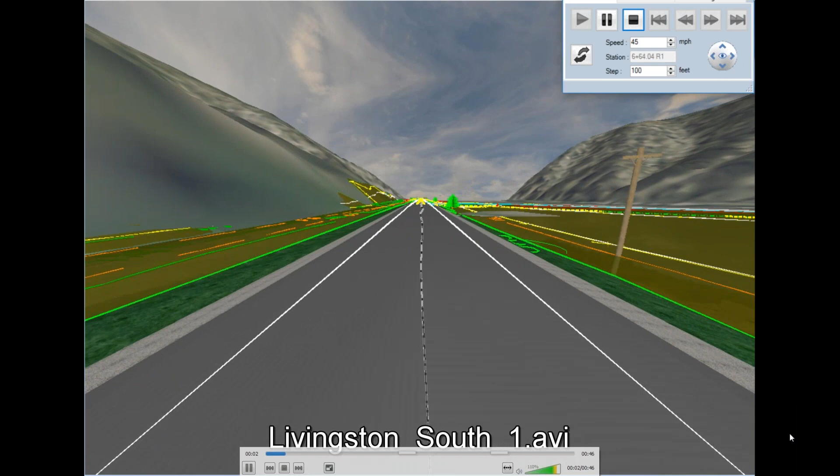So I remember when they started sending those out and talking to us about it, the whole auspice behind those was better design because our survey came in electronically, and then ultimately that electronic data would go back out to the field, and we wouldn't have to rewrite all those notes, recreate the entire project in engineering apps. That was 1998. Fast forward 20 years, and we're still not there. We're still struggling getting our design out to the field. They're still having to recreate that project in engineering apps.

Now, we're rolling out TBC. That's a huge improvement for them, but it's not nearly as good as what this is going to be able to do for the field. The other thing I love about this is, how many of you guys have done public meetings?

Have you stood up in front of a crowd and tried to show them plan and profile sheets, and watched their eyes glaze over as you're showing them these black and white sheets with a bunch of lines on them? They don't get it, they don't understand it, and that's not their fault. They're not engineers, they don't understand our design details. When we can roll out with a visual like this, or a model, and show them a video of what that road's gonna look like, that's huge.

It's a huge benefit, and it sets us up for success. A lot of our plans, they don't understand, and a lot of times we've gotten miscommunication with the public. They don't understand how close to their house the roadway's gonna be, what it's gonna take out with our project, and we end up setting ourselves up for failure a lot of times. Being able to roll out more of this is gonna be a huge benefit to us, and I think it's gonna make your lives easier going to public meetings, dealing with angry landowners, you name it. I think it's gonna be a huge benefit.

One of the major bills we had at this last session was Senate Bill 182, all about public involvement and communicating with the public. To me, this is a huge leap forward in providing that better communication, so that we can show them exactly what our plans are gonna do and what it's gonna look like, because they don't get that black and white, two-dimensional, bunch of lines on a piece of paper. This is a huge step in the right direction.

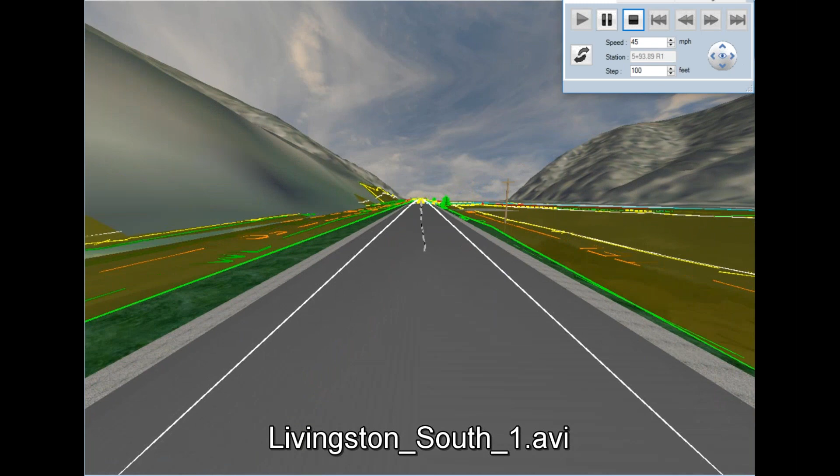Thank you both for taking time out of your other meeting you're supposed to be at, I appreciate it. Okay, I'm gonna turn it over to Megan now, but I want to announce that I do have a couple of power users in the room, Aaron Mason and Mike Dagenstein. They are just absolutely huge, I can't say enough good things about them. They are rock stars on my SS4 development team. This project you're looking at here is Mike's, and he did use this at a public involvement meeting. So if you have questions about how he produced this, or any reaction he had from the public, I'm sure he'd answer any questions you have.

So with that, I will turn it over to Megan, and you're away, buddy. Yay, thank you so much. Most of you guys have not had to sit through talking to me or listening to me talk for two days, so it's your turn now. I'm sorry. First, I'm gonna attempt to learn how to shut this thing down. Start there. There we go.

All right, first thing I've got is a fairly short PowerPoint, believe it or not, I promise it's short. I'm actually going to tell you what I'm going to do. We've got 5 topics. First one I'm going to go over is there have been some changes to our plan sheets, I'll hit those briefly. Then file structure, big changes in our file structuring based on the inclusion of a 3D model now. We're going to go through both the existing and the proposed, there's 2 different sets now that road design oversees, as opposed to us only having our proposed design files.

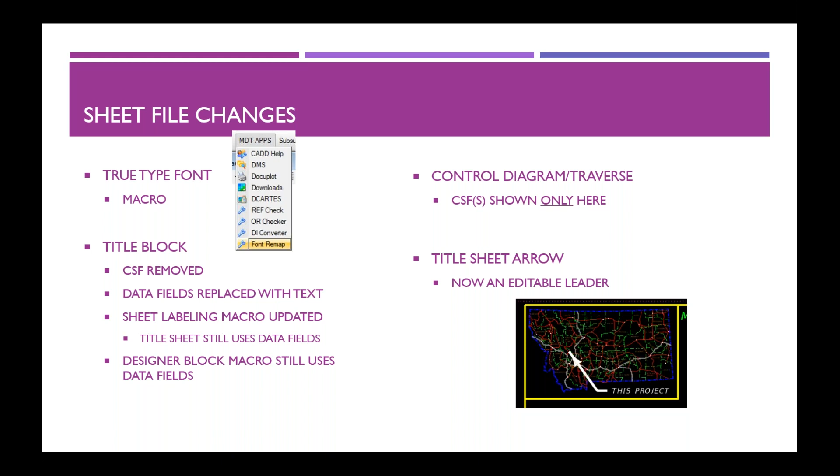That pretty much rounds out the CAD memos you've seen about plan sheet changes. I hope you guys are reading those, because I guarantee if you ask me about something that's in one of them, I'll laugh at you.

Moving on to file structure. The existing design files - we have new ones. We're not going to be relying on the DI map, the photogrammetry map.

We'll have a terrain file. This is a three-dimensional surface created from survey tins. That basically sums that up.

Second, we're going to have what we're calling an existing feature file. This is where it gets a little different. The existing feature file is the survey photogrammetry line work. We take it and copy it into our own file, and we do what we need to do visually to make it work for our cross sections and for our plans production. Survey is not to the point in their 3D development yet where they can give us the file in the format that we need. So we'll be taking all of their work and putting it into one single file of our own. We'll no longer be referencing 5 DI maps and a photogrammetry map, or even one DI map - what we're going to be using is this existing features file.

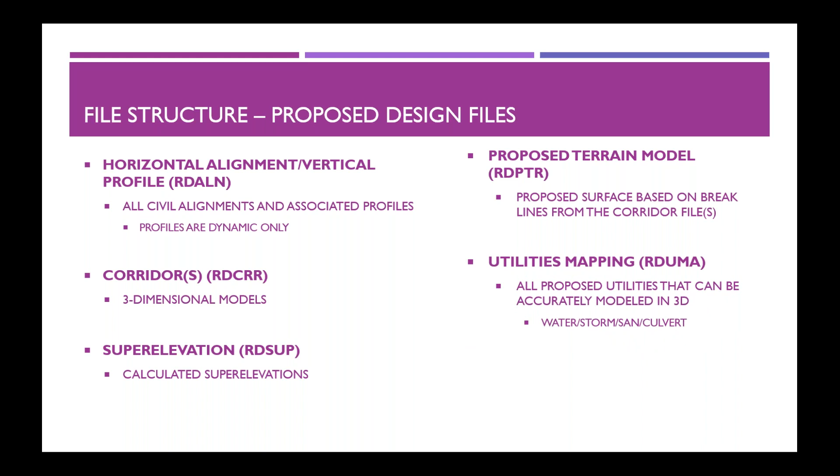Did you say the RDUMA is both proposed, accurately locatable, and able to be modeled, as well as the existing? Yes, we do have both. Yes, Damien, so how do you know if—

Oftentimes we have—I don't want to call it 2D, it's really just surface—we have SU-1 survey. We kind of know where the utilities are. They're below ground at this point. We know how deep they are. Are we going to do SU-2 on everything? Or how do you guarantee that your model has the utilities—

That level, then don't model it. If you don't need it to that level, don't model it. We still get the 2D one call, surface spray paint mark, put in the other file. That's the existing features file. We'll still have a file—the survey will still pick that up. Mostly I separated them, in my mind, into this is the hard and this is the more soft, flexible.

I have a little bit to add to that—RJ is in on the mix on this. We have an experimental pilot project on Custer where we're doing ground penetrating radar and EM induction, where we're able to locate to a lot better accuracy as far as depth goes. So we'll have to have some discussions as to where that information goes—it's not actually physically located, but we're within a few inches depth-wise where that should go. Yes, we will have to have that discussion. So that'll be above my pay grade.

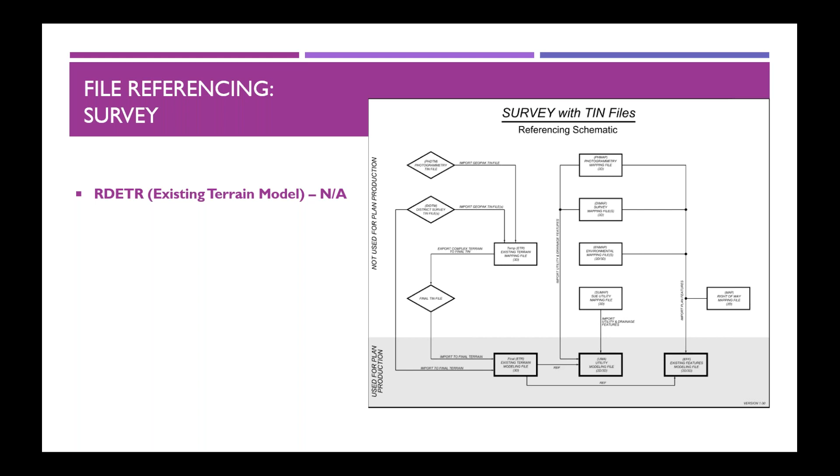Second one, the existing features file - same thing, kind of. These are the four types of files where you're going to merge in the line work from the other disciplines - photogrammetry, our district surveys, environmental wetlands type stuff, and utilities, if we've got just a planimetric SU where we're not getting it, it's not in there. The other thing that will get merged or copied in are existing right-of-way and eventually proposed construction permits, because this is the file we use to cut our cross-section ancillary features. Otherwise there's no reason for us to have right-of-way in there - we need it to cut those steps.

So everything on here, is this still a shape file? Not a shape file - it's a DGN. This is just a 2D file? It starts out as a 2D file. So everything that you're listing there is draped, if it's... it will be draped, yes. When you create it, all of these four files will come into the plan view two-dimensionally. We don't want the 3D data when we bring it into the existing feature file. So what about pipes?

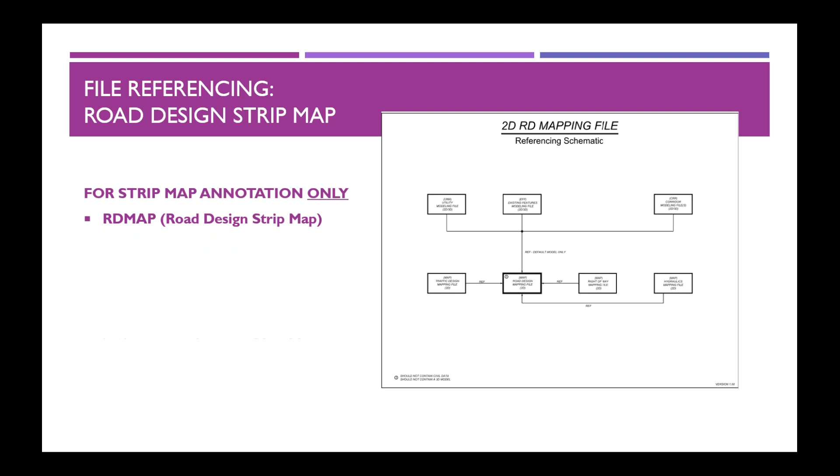We'll start with the strip map. The existing feature file will be referenced in. The utilities modeling file, all of the corridor files—that's where the construction limits are. You'll reference in your geometrics just like you normally would. You'll reference in the right-of-way just like you normally would.

And the hydraulics file. But none of this—the existing features, the corridor—none of that's going to actually live in there. Just that alignment and profile.

Now the 3D modeling—we've got everything split out into pieces based on Bentley's best practice. There are four different file types—watch me be wrong—four different file types that are utilized in our 3D modeling.

First one is the alignment file. That's the one you start with. That's what everything else is based on. Without an alignment and profile, you really can't do much else.

Second one is the corridor. Without the corridor, you don't really have anything other than the existing ground. So in the alignment file, you need your existing terrain, just like when we use criteria and we create that existing profile right off the bat.

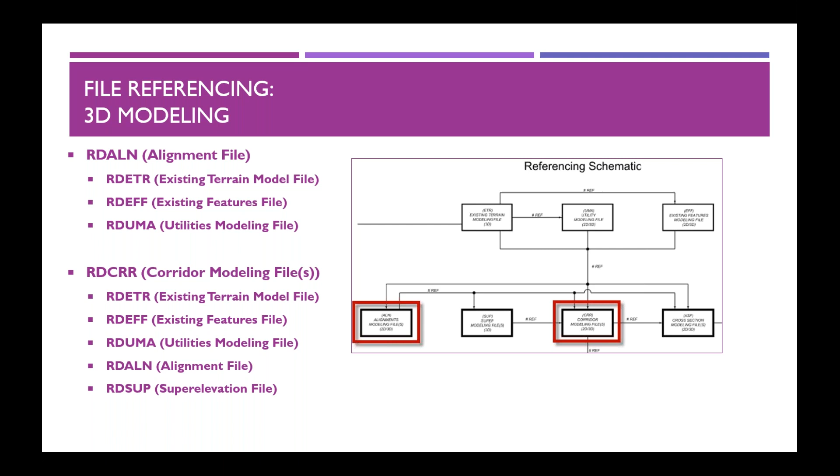So the other two 3D modeling files are the super elevation file, and there's that utilities modeling file again. The super elevation file has to have the alignment file in it. That's the only thing it needs in there. It's based completely on the alignment. It doesn't need to know what the corridor is. The corridor needs to know what it is. The only thing that goes in there is the alignment. It doesn't care about the existing ground, the existing features, nothing.

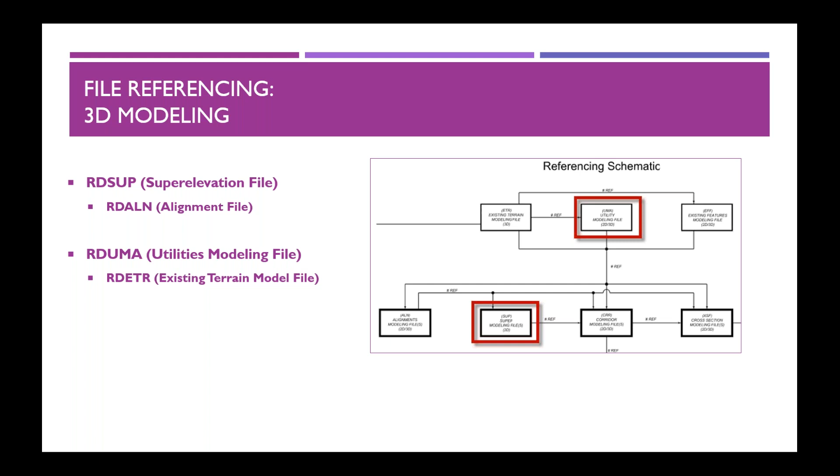Utilities file, it does need that existing ground. If you're looking at your proposed culverts or even your existing culverts, you can actually cause them to tie in to your existing ground. You have to have your existing ground to do it. Apparently that was the only one you needed.

Now, for plan and profile sheets. This is where I was saying that we're not gonna get the same things in our strip map that we're used to seeing. So anybody that uses our plan and profile sheets, anybody that looks at them, you're getting different things from different... yeah, Damien? I look at it. Oh. I couldn't have it, I didn't finish the sentence.

Corridor file, this is where your break lines are gonna be. This is where you're getting your edge of pavement. This is where the construction lines will sit. This is where ditch bottoms, any kind of break lines we're used to seeing will show up in this file, and only in this file. You are not gonna be copying them out of this. They are part of the model. They're integrated into the model. They're not separate line work.

Existing features file, just like we used to do with the DI map, same referencing scheme, all the break lines, those utility custom line styles we're used to seeing.

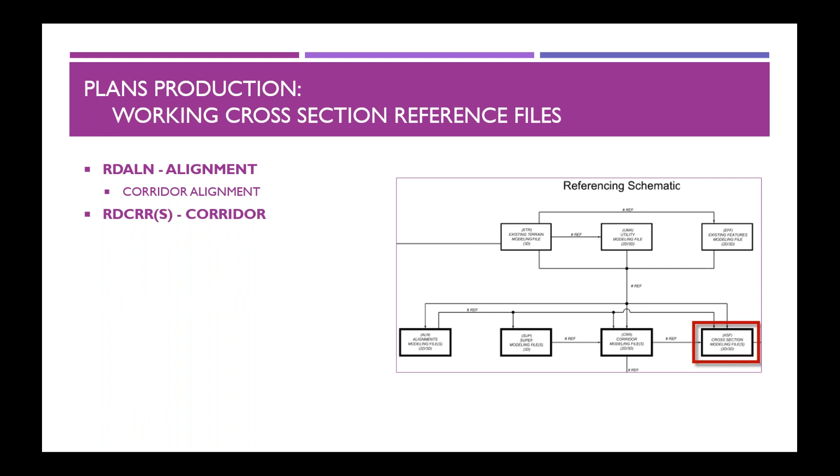So the list is kind of long. First, the alignment, corridor alignment. Second, all of the corridors. You're not going to see road typical section, you're not going to see cut fill, you're not going to see sub-X, any of that without the corridors.

The existing terrain model, that's what's going to cut those existing cross sections for you. They're not a separate entity anymore. Existing features - this is why we're talking about draping those utilities. This is where it will cut and put in the wetland, edge of water, overhead power, underground power features for us. That also is no longer a separate process.

Utilities model - like I just said, it will also cut modeled utilities or modeled pipes, I guess is probably more accurate, in the cross section accurately. Which, by the way, does look a little strange because it cuts them accurately. So if you cut down the middle of a pipe, you have a gap at the end because there's actually nothing there. So it's going to take a little bit of rethinking to get used to the way it's doing it. And that's part and parcel to the software because it is accurate - that we can't just change to make it look like it always looked.

That sums up the talking a lot portion of my presentation. Do we have questions that you guys didn't already ask me? And if you run out of questions, I will go into the example.

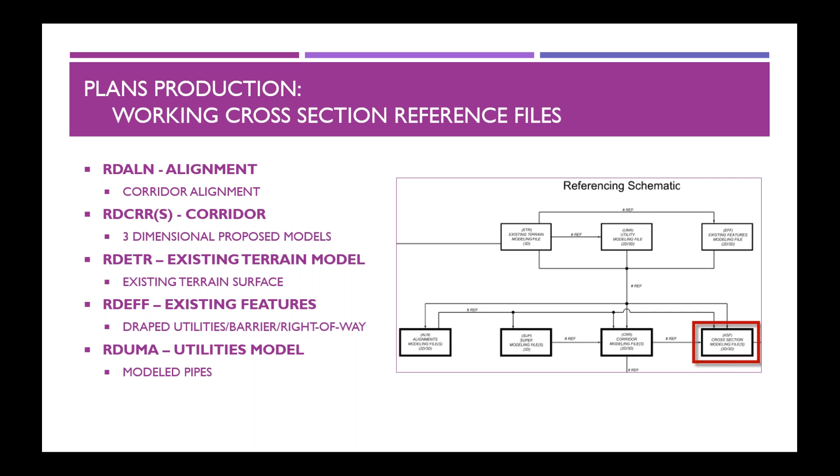All right. A lot of different files. Sorry, we keep cutting out. We got people on the phone. Do they have any questions? I asked, nobody's talking. You guys there? Anybody? Maybe they fell asleep. I tried to call in from my office and then got back from a meeting and the online portion wasn't working, so that might be when it dropped off. Well, they're still there. They're all still there. They're all still muted. Oh, Ben's unmuted, but. This is Ben. I don't have any questions. Okay, well, good. You're still alive. Good.

All right, well, in that case, I'm going to run through the basics of a project. That's hopefully better than I did the first time. What was that? I just told Bryce to look away. Oh.

All right, so the first thing you're going to notice is that this is not the startup menu that you guys are used to seeing. This will be the new one, which we intended to have rolled out before we started this. This right here, this Road 2018, I keep forgetting that you guys on the phone can't see this. This 2018 is our finalized enhanced workspace, let's say. It's the one where we finally got with Bentley and they showed us what we probably should have been doing before we kind of took off and tried to fly by ourselves with the first one. So there's nothing really intrinsically wrong with the enhanced workspace we have now. This one's better. It's not going to be a big change across. It's not like the enhanced versus legacy. You guys that don't model or any of that, it's not going to change a thing.

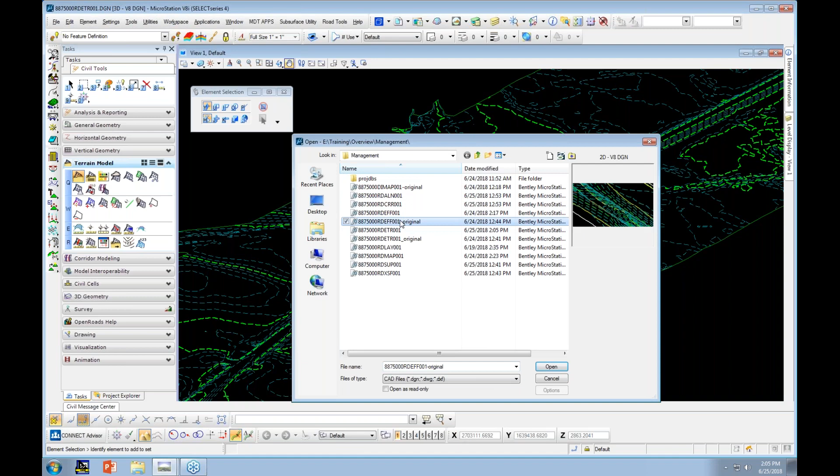Now, the original - here's my original survey line work. And I'm not trying to lay blame on any survey crew, I'm just trying to prove a point.

That's what came in, that's my center line. That's how that was processed and sent to me. It just so happened that I was far enough along in the project that I didn't even notice. So, I mean, you don't even notice.

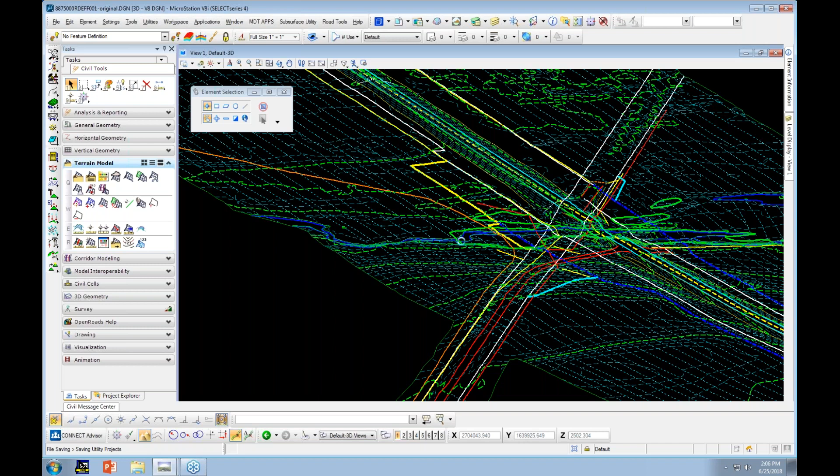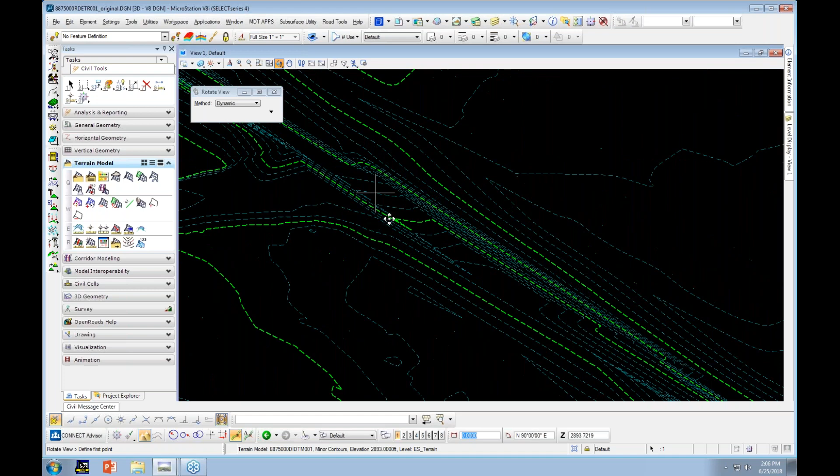So this is actually, whoops, the same thing. There's my edge of pavement center line. I don't know how you guys see that, but I know where it is. The original.

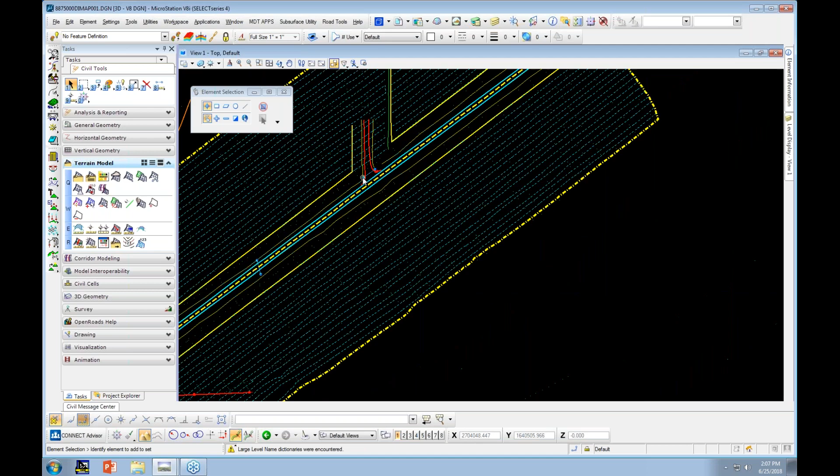That's my bottom of bank. So that causes a really large blowout in my terrain. And the only reason, like I said, I'm not trying to lay blame on the survey crew, but this is why we need to be checking these.

This is, I have a TIN and a DI map that are different. They have errors in different places. Because the TIN caught this blow, but it didn't catch the edge of pavement in the center line.

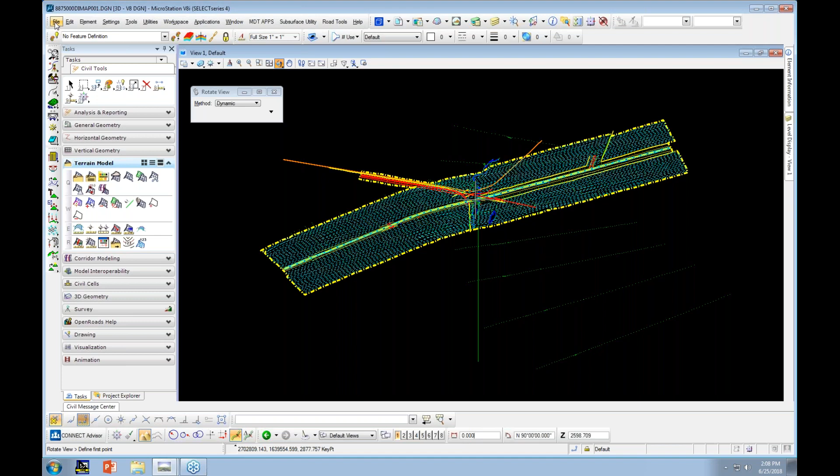So now I'm supposed to create a 3D model off of this, because it's not supposed to be me that's editing it. This is one - sometimes we've got to merge five of them together in a different combination of merge and append.

It's a nice thing too, there's a couple things that makes me think of. All that 3D line work came from survey. It's accurate to elevation and location. It comes in as 3D line work. We don't use that - we take their 2D line work and drape it on the TIN.

Yeah, except for the terrain part. Right, it is break lines in the terrain, but I just, like this culvert placement, the pavement markings are the detour pavement markings. So it's showing me the crown of the road moved 2.5 feet over, but there is no point shot out there in the travel lane. So it's, do we need to change our methodology? Should we be shooting points closer together, stuff like that?

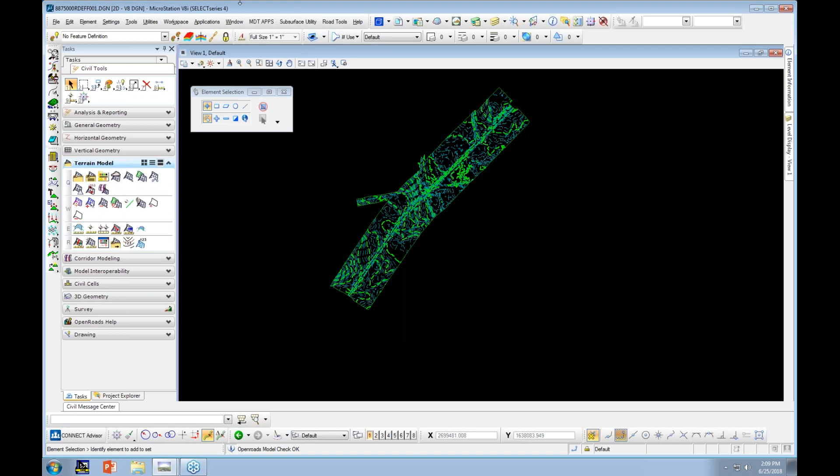Now I'm going to get off my soapbox. I made my point. It seems like there could be some error introduced there that might not be easily caught.

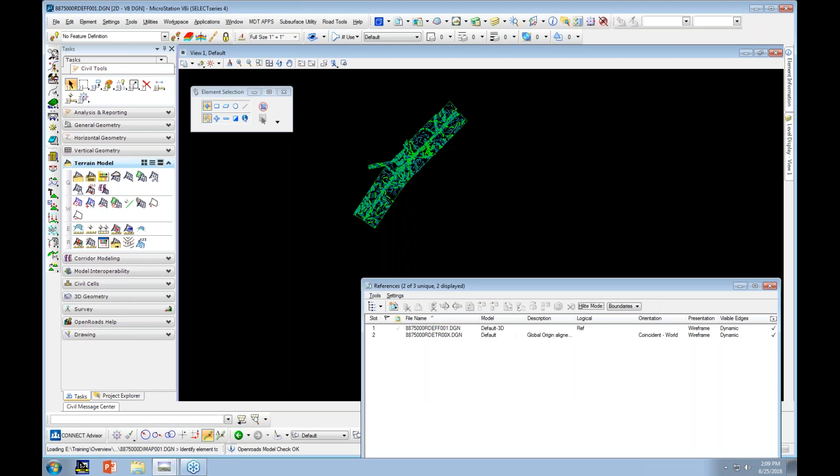Alright, so this is the existing feature file. And I'm not going to get real into this, but this is where I would get environmental, district survey. In this case, I'm grabbing the right-of-way map just to get certain pieces out of it. Pull it all in, and then you would go and merge it into the master.

So then all the levels are on first. Yeah, I'm in a hurry - I ran out of time last class, we're not going to be picky. So now what I've got is a two-dimensional strip map, planimetric, completely flat. But I've also got my terrain in here.

This is where that ancillary features comes in, and this is what the designers are going to do for each of these features. So if I've got - there's my overhead power - what I'm going to do is apply a feature definition to it. That's a preset set of specifications for what it looks like: plan, profile, 3D, and in cross section. That's how that ancillary cell gets populated.

It's pre-set up. This is what Bentley went through with us, we vetted it over and over again, we're happy with what it's doing. I'm going to just very quickly do this - I'm only going to do it once instead of making you guys watch this 30 times.

I got the power overhead around it. All right, there it is. U is underground, X is overhead, not crossing. So it applied it. It's not anything that you guys will notice, but now that we've got it...

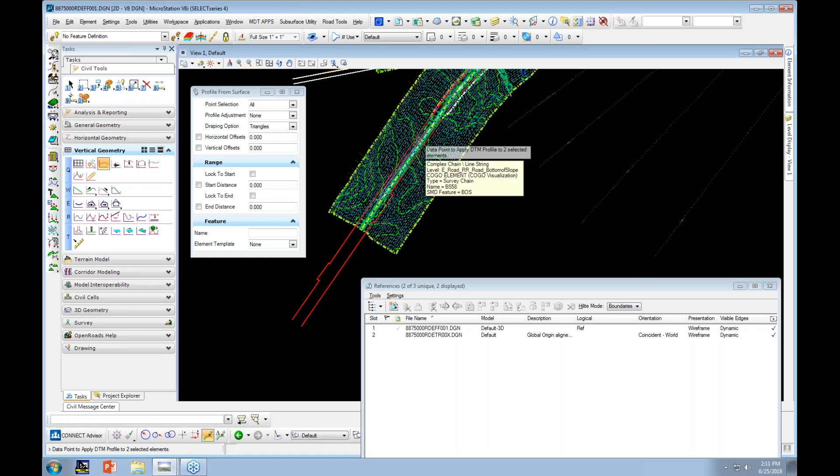This is where you get your ancillary feature to set on the existing ground. You're going to create a profile from the existing terrain. So I'm only doing this for the power, the overhead power that I grabbed. Ignore my click happiness.

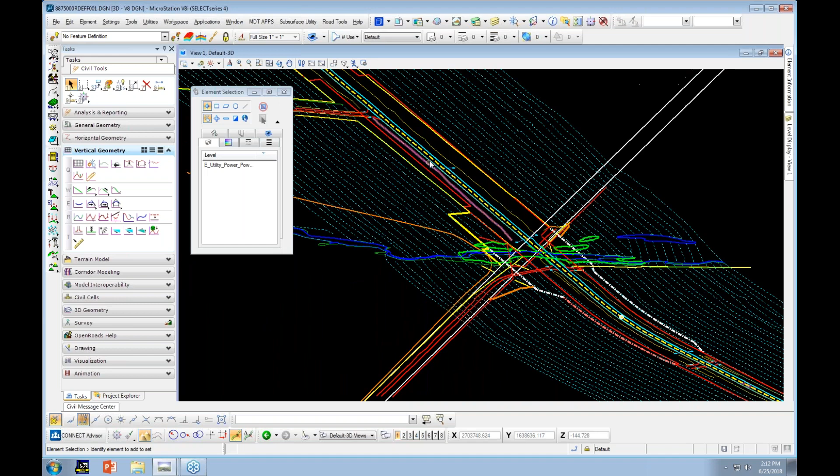Then if we go and we look here in the 3D model, apparently I already did it. Ahead of myself. There, that is everything draped on the terrain.

So now any cross section that's cut needs to actually have the correct line height. That's what that'll look like.

Once you get these two done, put them on DMS, pull them down as view copies, do not mess with them unless for some reason you need to add something. If you get a pickup survey, when right-of-way gives you construction limits or construction permits, when final new acquisition gets defined, those are the kind of things that you'll put in here later. This isn't one that gets pulled down every day and messed with.

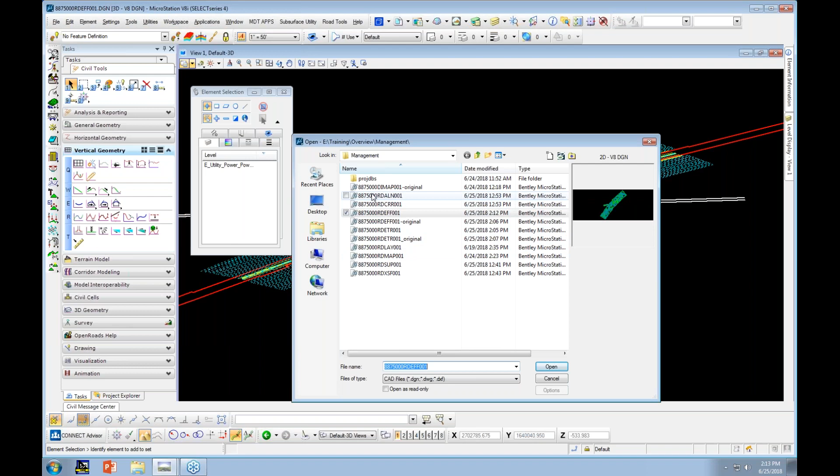Once you've got all of that, then you actually go into the design.

Really? No, it's not. I promise. Oh, it is. I have two files open. All right, this is the alignment file.

So I've got an alignment drawn here with civil geometry. It looks the same as a drafted one, except it's marked. All these labels that you're seeing—the bearing, distance, radius, start station—that can all be changed, and it will filter through to your profile, to your corridor, on down the ripple effect.

Profile, same thing. Profile's got all its pertinent data in here: curve length, K value, slope or grade.

One thing about the civil alignments profiles, these two are incontrovertibly linked. Unlike GeoPak, where you have a plan and a profile that really have nothing in common as far as the GPK is concerned, these two only match to each other. So if I create another horizontal alignment, even if I copy it, this profile that I've got right here doesn't come with it, can't be matched to it. You have to create another one. When you export it to GeoPak, you lose that, but as long as it's in OpenRoads, they are a pair.

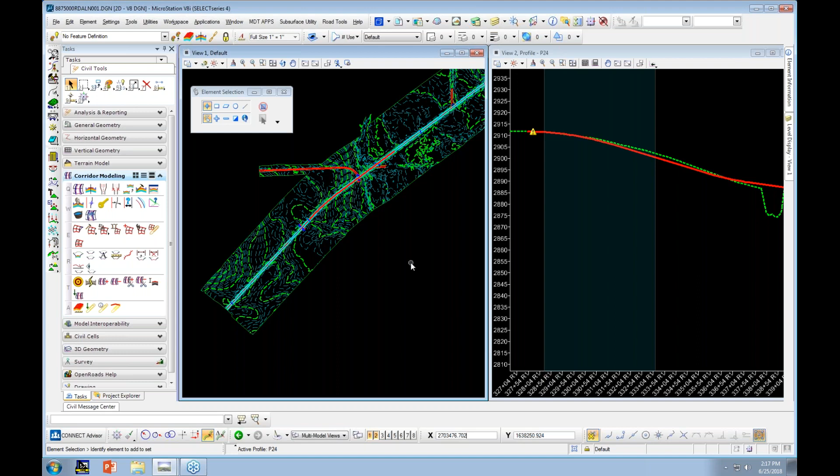Center line, put it on wherever you want. So in your interstate, you're asking, we have a median alignment that sort of dictates what's going on horizontally, but it could deviate off from that.

We can absolutely do that. The sky's the limit. We could add ditch alignments and profiles too, and you could have your cross sections running off of yet a different alignment that has nothing to do with any of those, just because you want to capture everything that's going on. There's no limitation to that.

This is one of those things: draw it off of here and it has to go left and right. But this profile is what the 3D element of that horizontal is doing. These two are together, there's no taking them apart anymore. When she created this profile and activated it to that horizontal, it's not just some bunch of geometry that can be separated out from it. It is tied together, and they look at each other for defining.

But I can certainly take, maybe this is what you're asking, that median alignment, and run a separated template down it, but then I can run an alignment down the inside shoulder of, say, westbound and the inside shoulder of eastbound, and tie that template to those as well, as separate pieces. Your center line would still be down the median, but you can tie any pieces of the template to something else and build off of it.

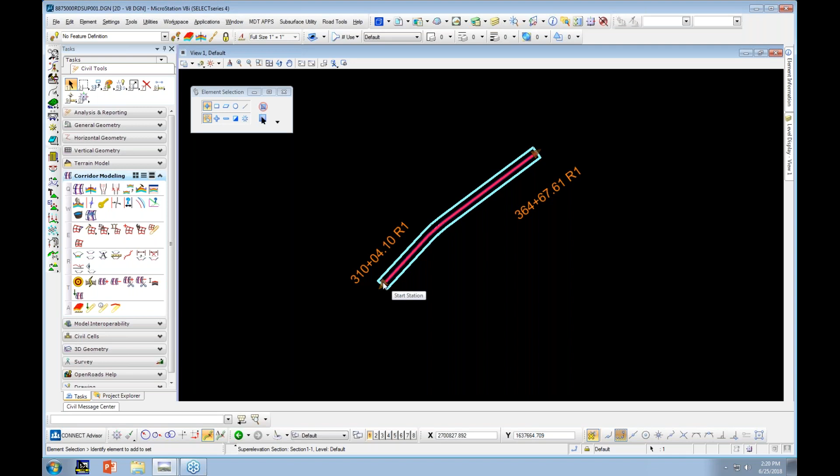On the modeling side, now what we're going to do is create the super elevations for this. We have our horizontal, we have our vertical. And what the super elevations look like, it gives you sections. You can usually get away with one section unless your project is, say, 11 miles long, so it doesn't have to necessarily be divided. Within the section there are lanes, and these are similar to what we see in criteria.

One thing to note, in OpenRoads, -2 is normal crown on both sides, for some reason. It's not like criteria where one is positive and one is negative, but it's different in the templates. I don't know what the designers, or the programmers, were thinking.

But you get these lanes in, and then you tell it to calculate. We have, courtesy of our awesome EISS staff, what are called SEP files. We've got our 2-lane open road, low-speed urban, the multi-lane interstate. We also have the no-rotation ones. This is left over from not offsetting the alignment 12 feet in the middle of the super. These ones rotate about center line all the way through.

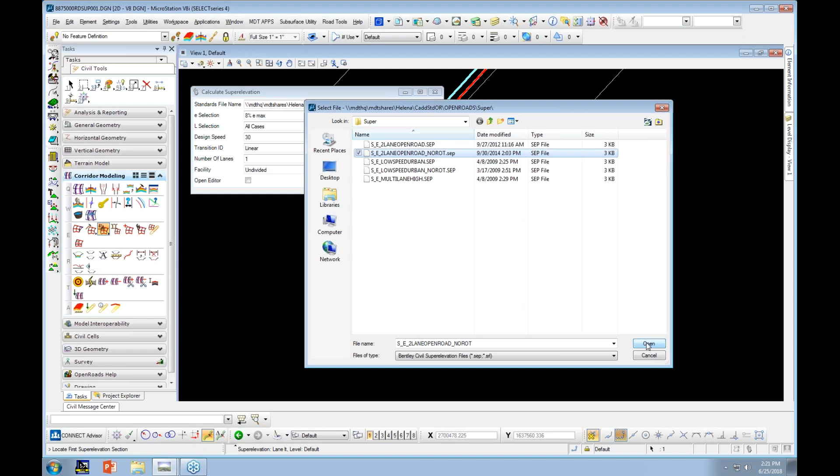So that's what I'm going to pick for this. Design speed, and then divided, undivided. Oh, that's what it's supposed to be. So I'm going to get click happy again. Just assume I know what I'm doing.

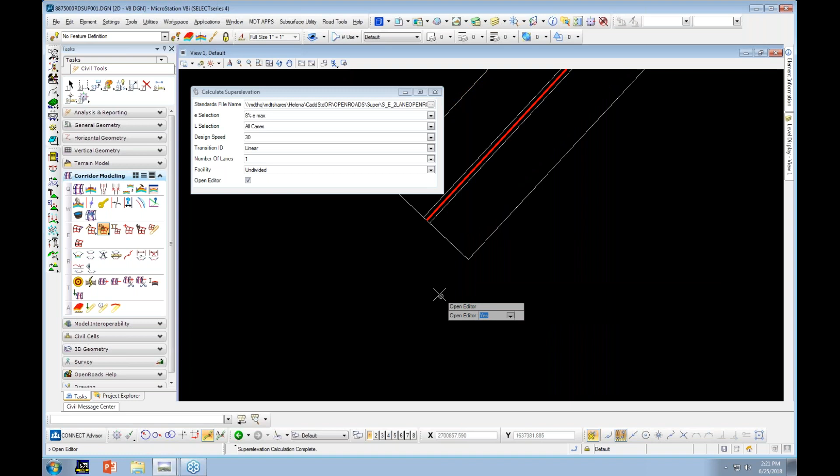This should not be played with, but I wanted you guys to see it. But it should be checked. Absolutely, it should be checked. I found, particularly since this does not appear to have the 5% super it's supposed to... you have, nope, I've got a 2% super. Oh wait, that's why, I only have one left edge.

See? This is why you check it. And it gives you a graphic representation as well as the chart here. So just know that's there.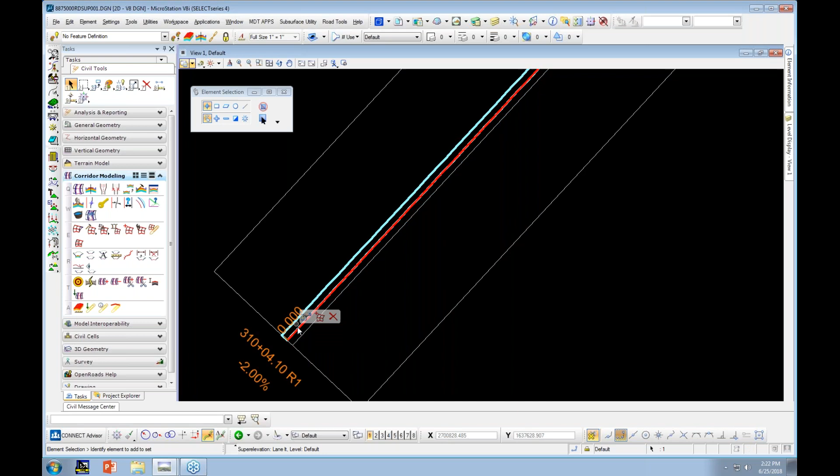And for the 30th time today, I don't know what I just did wrong. I think we need to reiterate how careful they should be with this, and that somebody should be doing QA on it, because I found a few glitchy things, like the transitions sometimes don't calculate through, and I'll have to go in and manually put in a point just at zero, or normal crown, and non-standard spiral lengths.

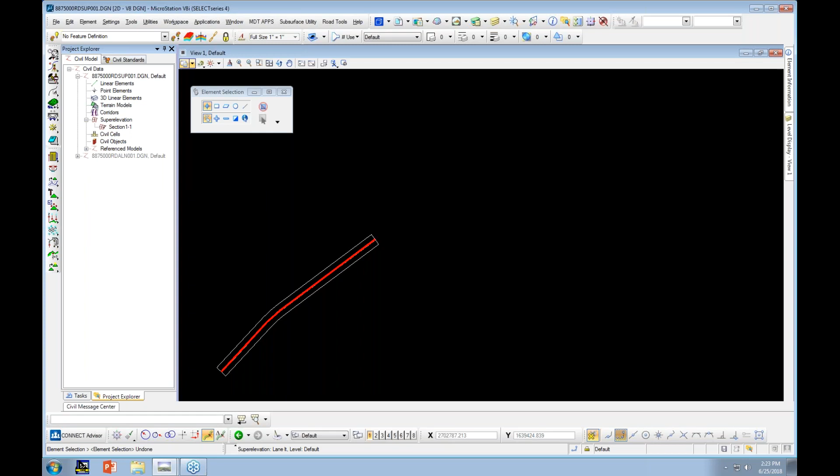It uses a really... I went to Jim Dunbar, since he's the resident super expert, and he pulled out a 1958 highway manual, and he showed me what it's using to calculate the non-standard, but it gives you these really long transition lengths. We were just trying to match an existing bridge end or something.

See, I would not be an engineer if I had to do it with quill and parchment paper.

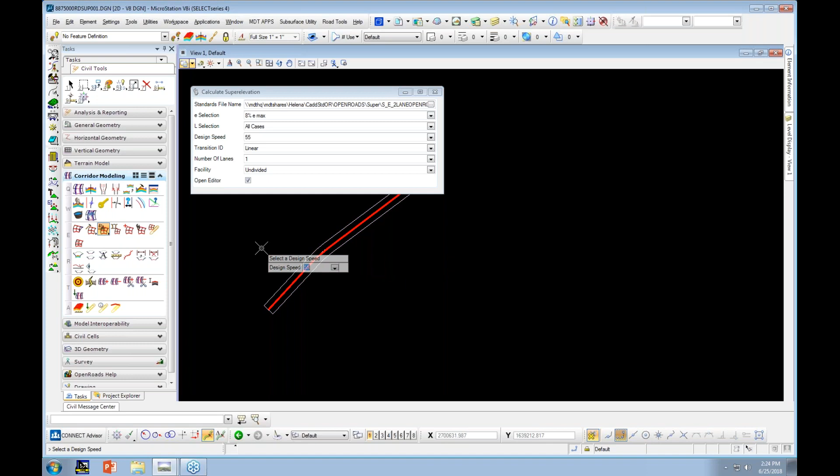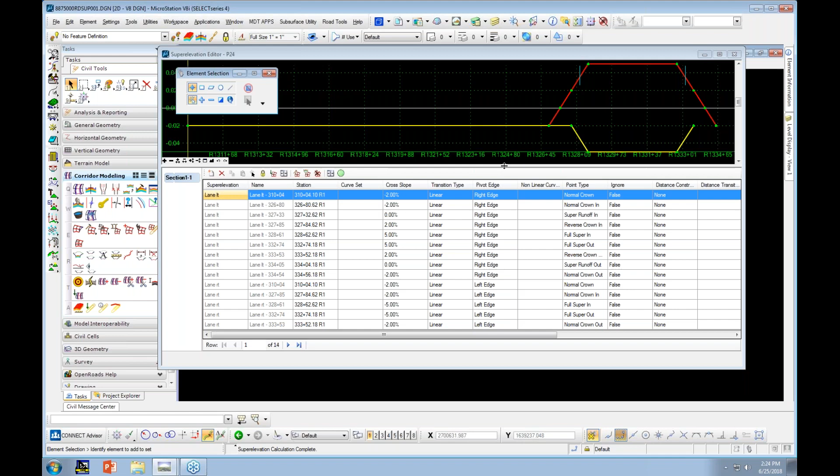There we go, it's better. Now it's got both sides. It's still dropping that normal crown off the end though, so if you had another section it transitioned to, you might have to put that in there manually. So I think everybody's gonna have to learn - those are relative grade lines we're looking at up there. You're looking at normal crown as the combined line. Like I said, they're both negative 2, even though that seems really bizarre. And when they split, that's actually the supering coming back together.

Mike's right, it did not finish the line. I always check those transition lengths, just double check them - sometimes it gives you funky ones. Not great with reverse curves or curves real tight to each other. It's only as smart as its programming. It's way easier to manipulate than our SUP file, so let's not waste any more time on that.

Super elevation. This is what I consider the fun part of this - the actual corridors.

I've got 2 corridors here that I have not applied anything to. All they are is a link to the entire alignment that says I can do something with this. There's a 3D model possibility here.

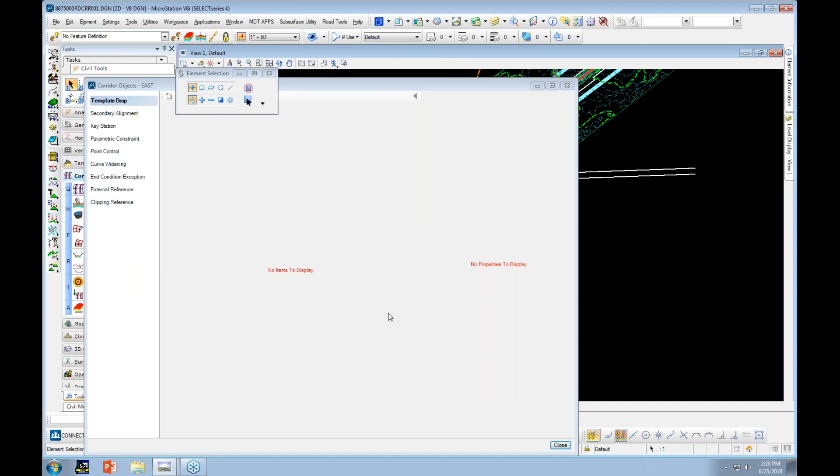I'm going to take predetermined stations - somebody wanted to know last class how I knew where I was putting these. Rich told you. Right, I just pulled them out of somewhere.

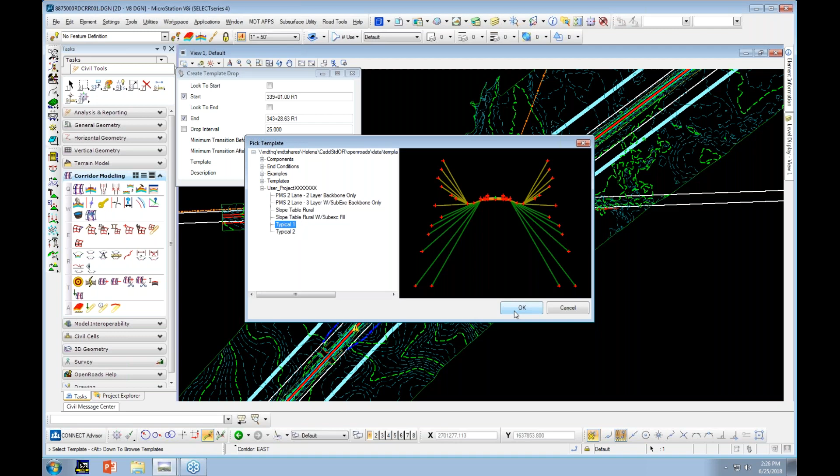So I'm using JJ and Bentley's default template library that they created in our CAD share drive. They can either do a save as, or they can import pieces of it. We're going to do a templates class in a month and a half or so, because there's a whole bunch to these, but I don't have a week right now. So I set all that up, and now I'm going to get click happy again.

Getting rid of the old. Let's see the new.

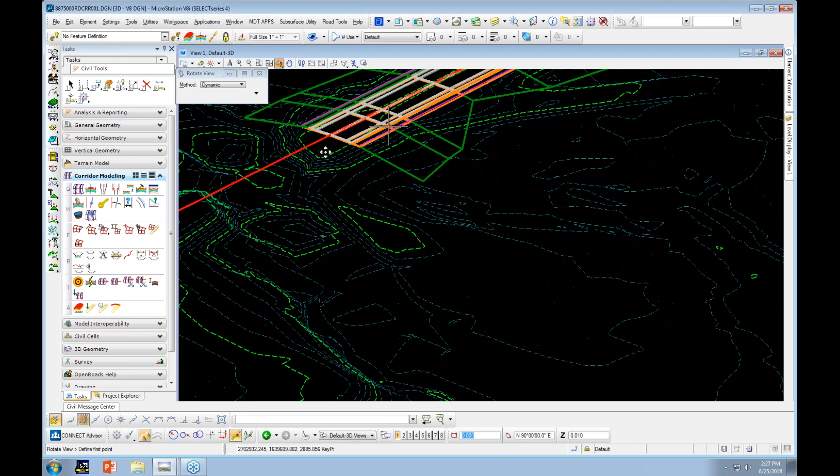Right here is your 3D model. Turn on - these have materials associated with them. You're looking at your asphalt, your tack, and your surfacing inslopes right here. This side is all fill. So these inslopes are designed the same way as criteria - they solve based on the same set of parameters, the fill height.

So I'm going to put the other side of the bridge in. You do want multiple corridors if you're doing a bridge for earthwork purposes. It has a habit - earthwork and terrain - it has a habit of trying to calculate across the gap, even if there's... do you want to maybe just show them real quickly the template and do a test on the end condition? Yeah, just so they can see what it's doing.

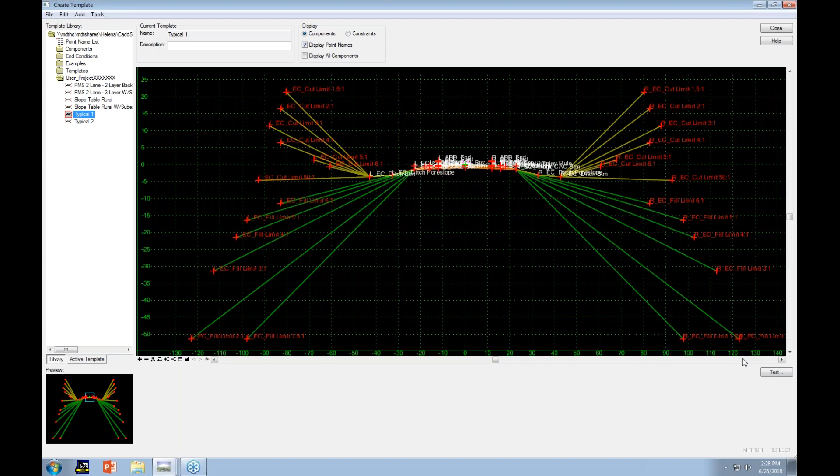I mean, it's essentially your full array of what are my end conditions, should they be. This is our full array - you can see there's way more than I care to think about. What Aaron's talking about, see how everything there is kind of fuzzed out?

Oh, hang on, just do 0. Yeah, that didn't work out so well. All right, so you can see I'm drawing - as my cut height gets higher, you can see it changes what it's solving for. And this is straight out of our geometric design tables. Anything outside of that is manipulated by the designer with intent, otherwise it's full standards.

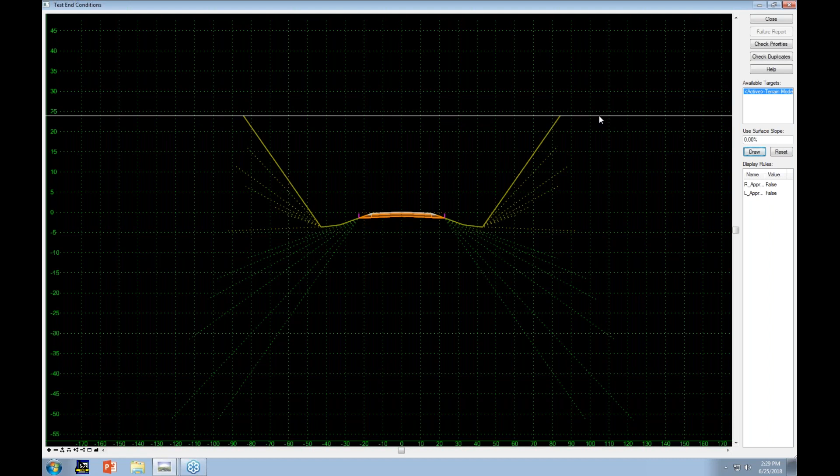This is what it'll give you the first time the designer drops the template. How does it calculate it? However often you want to drop it - it's not, you don't have to. I put this first one in at a 25-foot interval. I've gone so far as to do a 2-foot interval. Yeah, I don't suggest that, I think you'd have to do a lot of cleanup, bouncing back and forth or something. It depends on how uneven your ground is.

Why am I in my picture? Oh, never mind.

All right, I'm going to put the other template.

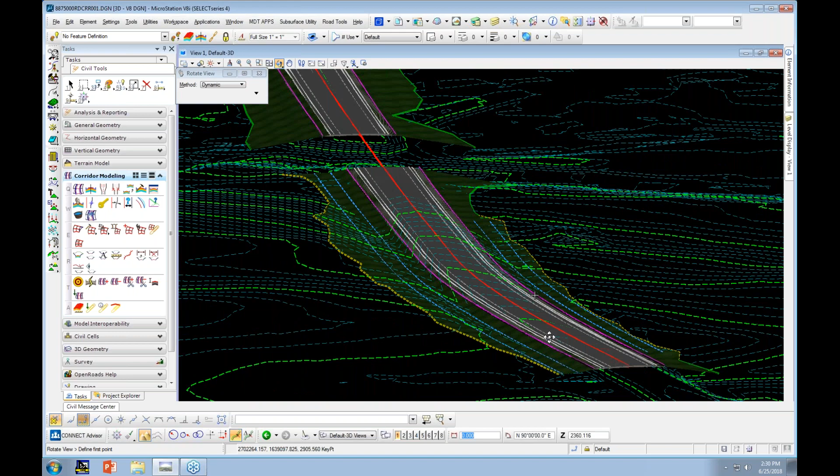Same typical, same drop interval. Now you can see there's some yellow there, on this side. It's solving for fill. Those blue dashed lines right there are ditch bottom, front of ditch, and back of ditch.

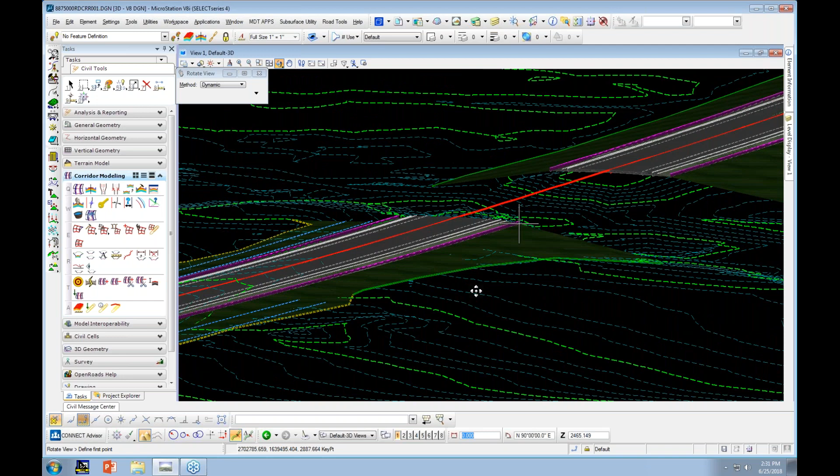And it does all of this on its own. I haven't given it any particular constraints, haven't changed anything off the default template. So this would be what I would want from a designer for AGR: give me a plan, profile, and drop a template. Congratulations.

Once you've got this, you can do a whole bunch of tweaking, which I'm not going to get into. That'll be stuff for the template. You can basically manipulate every piece of this template, and it's an extremely involved process, based a lot on design intent and engineering judgment.

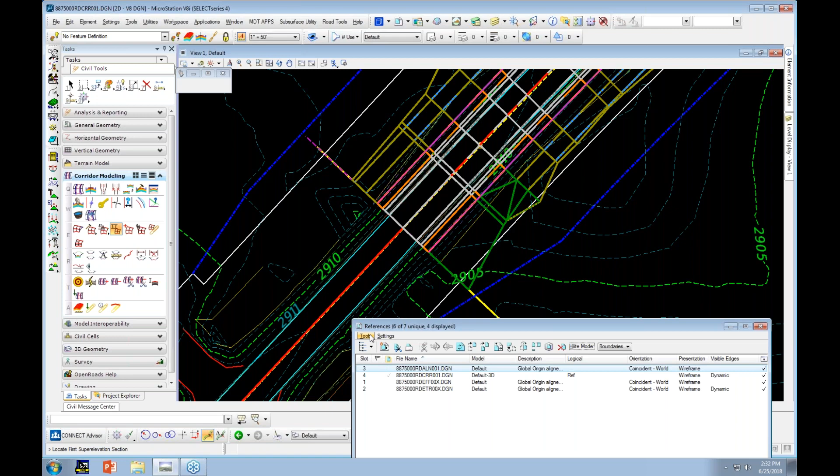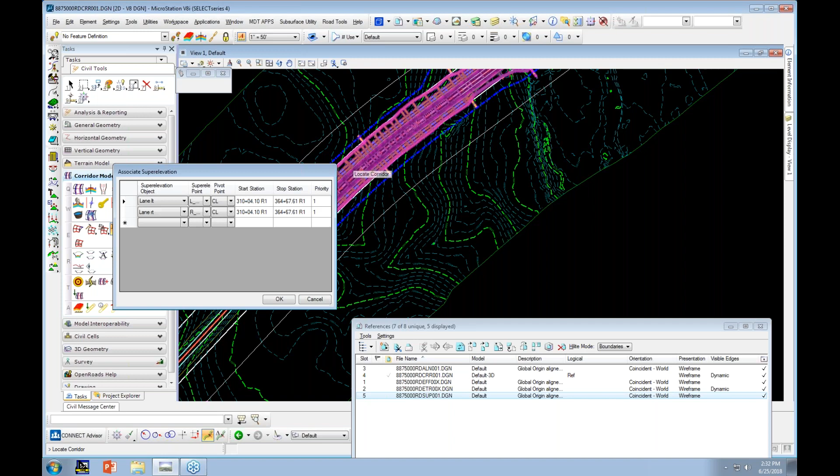I am going to assign a super elevation, I think. Maybe I am. All right, there you go. So you're going to see right around this curve area, when I do this, you'll see it adjust. Didn't adjust much, but it did adjust around the radius.

Next step after you've got the corridor is to cut the cross sections. This is, in my opinion, the most different part of OpenRoads versus criteria. They don't work like we're used to. I go into the cross section file here.

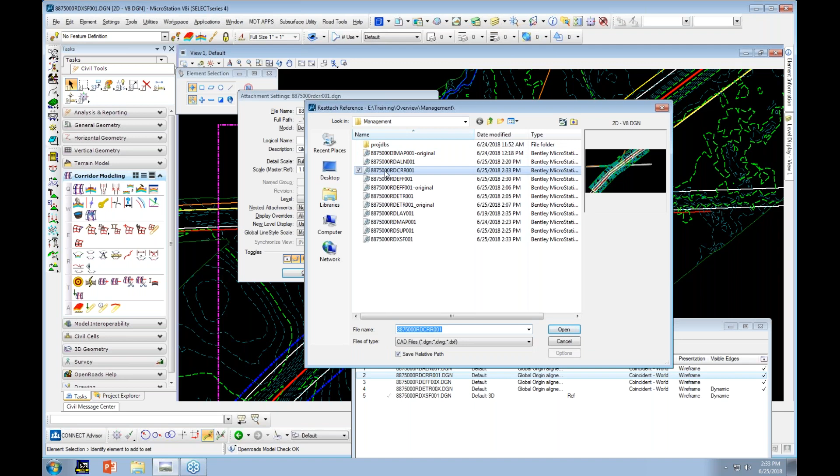First and foremost, I have to have everything referenced in. You're seeing all of my plans. There's my alignment, proposed right-of-way, all of the existing, my wetlands. What I don't have in here yet is my corridor. Oh no, I've got it in there. It does help if you turn this thing on though. So there it is, that's what corridors look like in plan view.

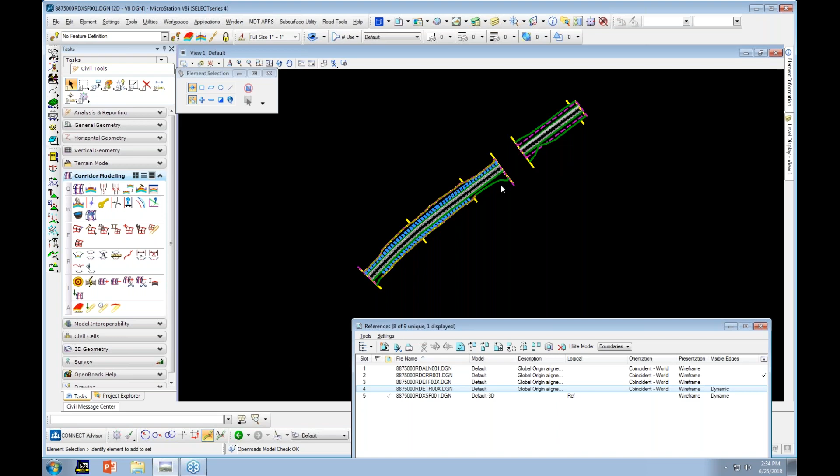Remember I was talking about how we get our plan graphics? There's all your plan graphics for plans production, for your plan and profile. And each of these different colors, different pieces, is on a different level, so I can turn off whatever I don't want to see. If I don't want to see the outline of the template, there's my construction limits, break line, edge of pavement - it's all there.

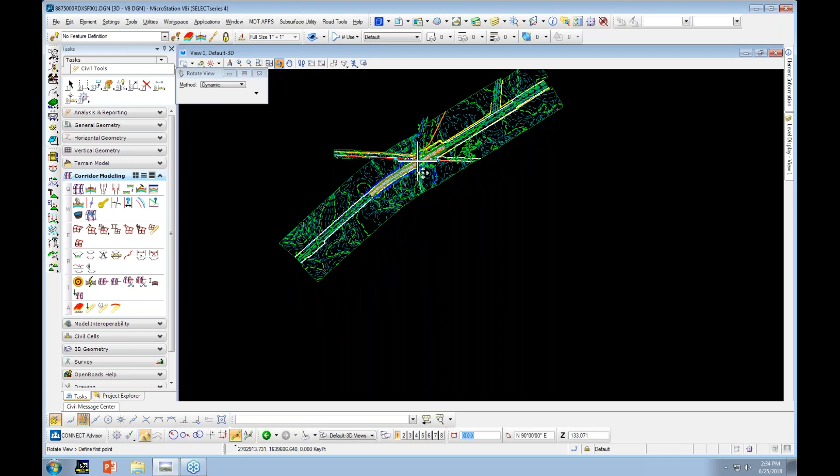What we're interested in, as far as the cross sections themselves, is what's showing in here. Anything we want to see in the cross sections has to be shown here. It doesn't have to look like the ground and the pavement. It just needs to be visible in the 3D model.

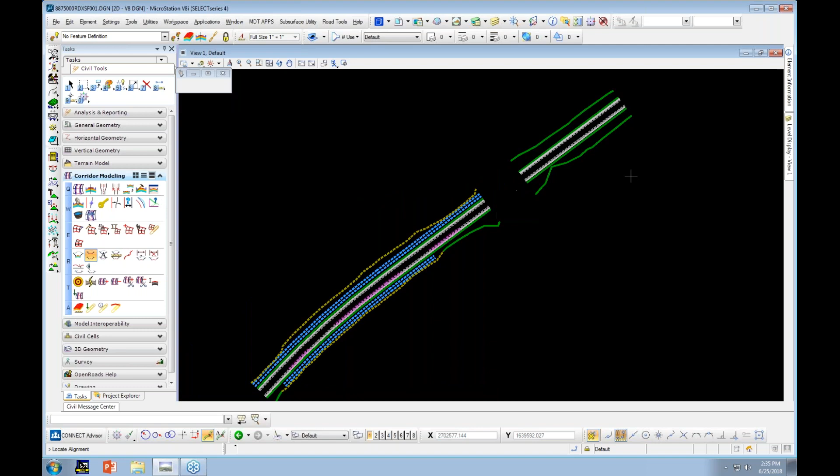Last class, this did not go well. See if I can do this. The way you cut cross sections is based off the alignment, it's not actually based off the corridor. I can cut cross sections on both of these corridors. If I have a detour alignment off it, it'll cut those. If I have sidewalks, side roads, it cuts them all at once. Everything is visible in that model.

We have some preset preferences, courtesy of JJ. You can set up a cross-section run, which would be similar to when we put pattern lines in criteria. OpenRoads puts pattern lines in, but they're an after-the-fact thing and have nothing to do with the actual cross-section cutting itself. So this XFC allows me to save any key stations, bridge ends, my interval.

Let's see how this goes. Now it's going to create another model outside of the default 3D, and it creates cross sections in there. Cross your fingers for me, we'll see how bad this one is this time.

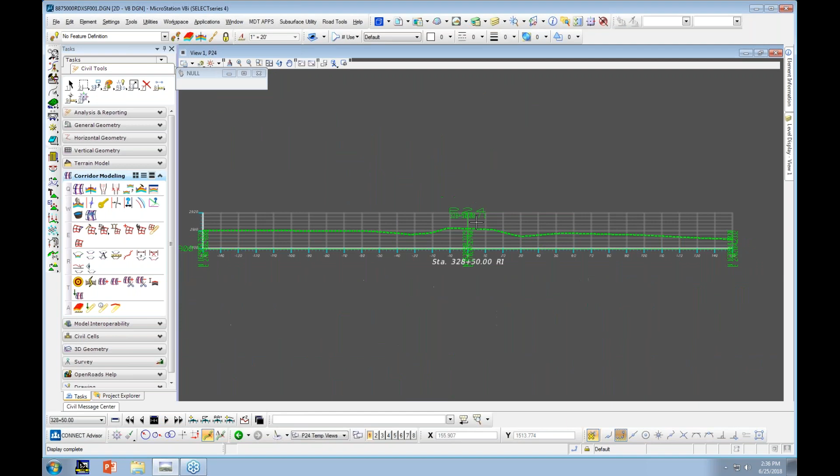Oh yeah, all right. So what I got told last time - you can see I don't have any existing ground. Existing ground is dashed now. I'm sorry, I don't have any proposed ground. Man, he finally catches on. Yeah, we don't want existing ground. All right, I'm done. Okay, we'll see if that little trick works.

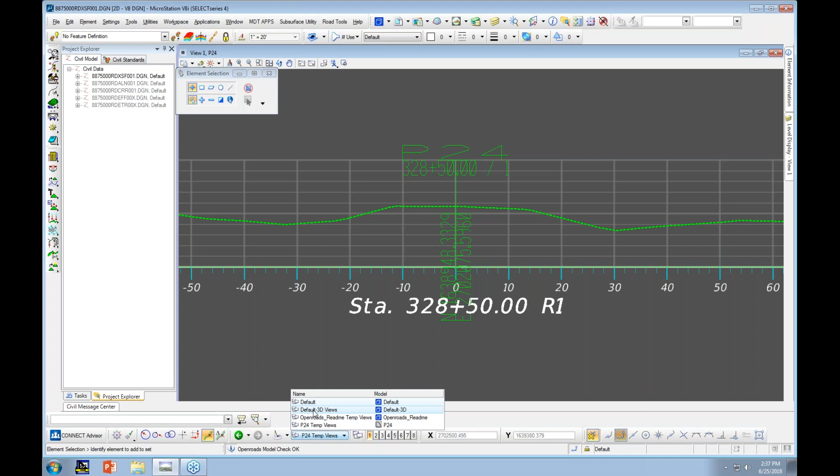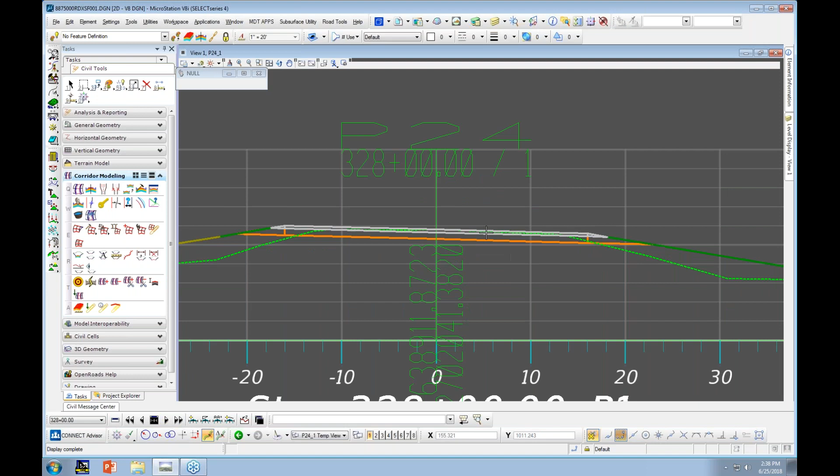That looks slightly more hopeful. All right, there we go. Awesome, this is what OpenRoads cross sections look like.

Notice they're a little different, because we have separate pieces in our templates we are going to get these lines. Because we manipulate these pieces, we can't take the lines away because that makes them one piece.

I had comments originally that these lines needed to go, I can't take them out. Yeah, just leave it. So what do you... oh. Haha. And I just did something else wrong. All right, we're gonna run that a third time.

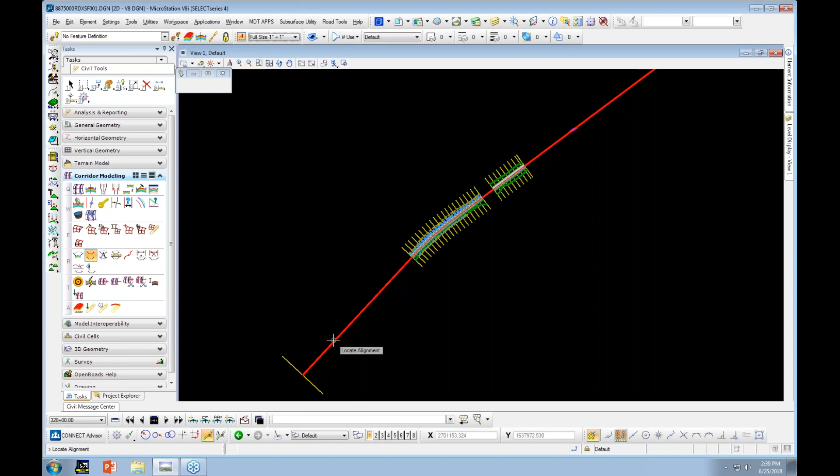Turn on annotation, because those little ancillary symbols are actually annotated. So by the time I get done with this, you guys should be able to do this, right? It's the third time I run it. Next thing is it's not real slow. Problem is that it doesn't put them on top.

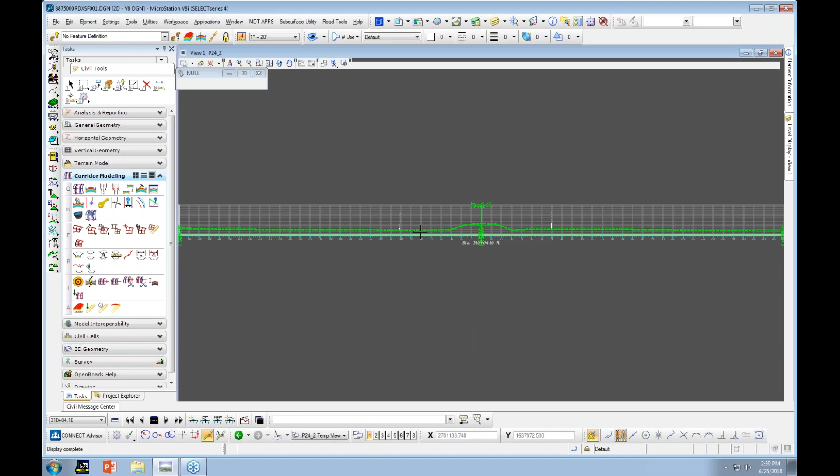There we go. All right, so now that I have the darn things on, there's all my ancillary. So I don't have to set up anything extra, those come part and parcel with it.

I should have some in here somewhere. What's my other thing? There, there's power, guardrail, wetland boundary. I turn the rest of them off. You can actually have it say PTW, edge of pavement, top of slope, bottom of slope. They'll put every one of them in there if you really want to see them.

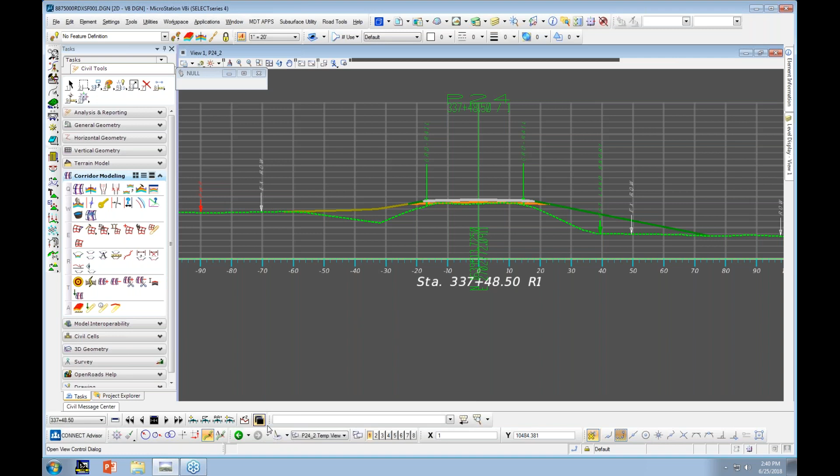Now be aware, I've run them 3 times, I have 3 models now. Layout sheets created the same way in criteria or in GEOPAK. The macro picks the model with the smallest number. So if my P24_2 is the model I want, I have to rename it something else, or it won't pick that one up, it'll attach all of the P24.

Can you delete it? Yes, you can. So I could go back and I could delete these 2. So now I've only got the one, it'll pick up that one.

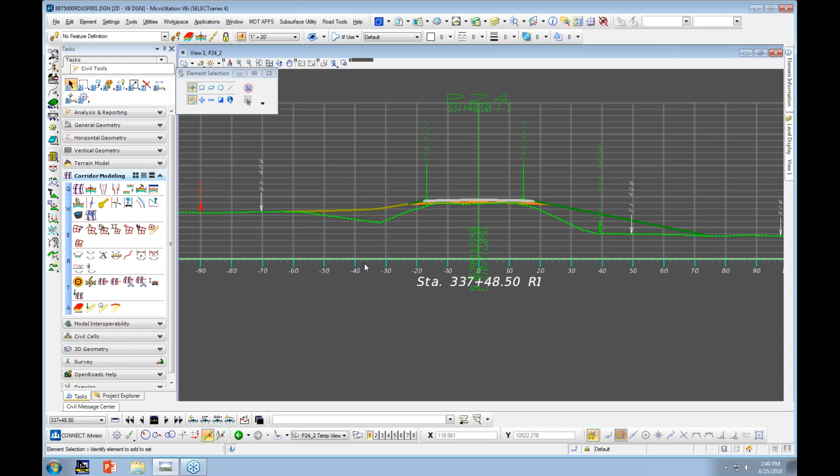You see why we don't want to keep putting labels on cross sections? Let me up the ante on that. So if I go and I add a key station to this in criteria, it puts it at the end. This thing creates a new model, puts it in order. So now any labels you've got from wherever that key station is no longer line up.

And they're not off by any kind of standard offset. So basically you would have to go in and do it again every time you have to recreate cross sections, which is why we're really trying to get away from putting all of that text in our cross sections. We can show it other places in the plans.

Now you notice that this thing didn't label. Labeling is separate in OpenRoads. We have 2 different ways to label. I'll run through both of them really quick. The first one is part of OpenRoads itself.

So I set it to do offset elevation. All of these that you're seeing in here are named features that are cut in the cross sections. Most of these ones don't mean anything to me. These ones do, there's my fill limit. You notice I have east and west because I've got both corridors cut in there.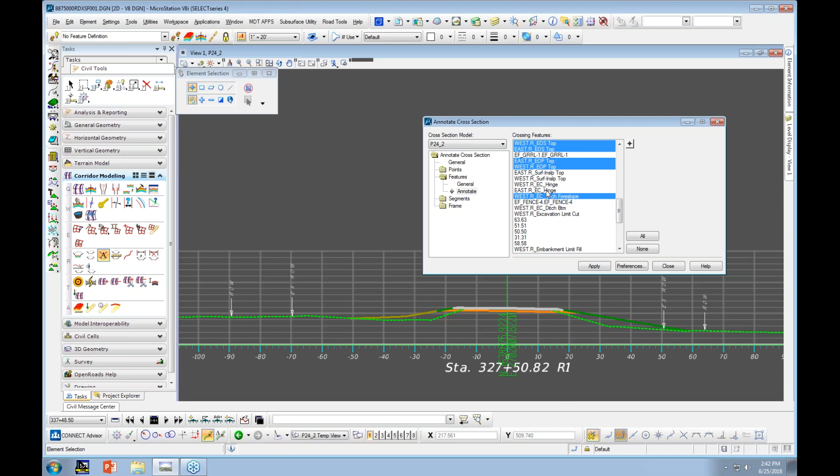So I'm just going to haphazardly select a bunch of these. Okay, not haphazardly, I can't do that. What's going on the left side there with the hill? This? Yeah, that's gotta be a transition daylight on the... No, yeah, that's my begin station.

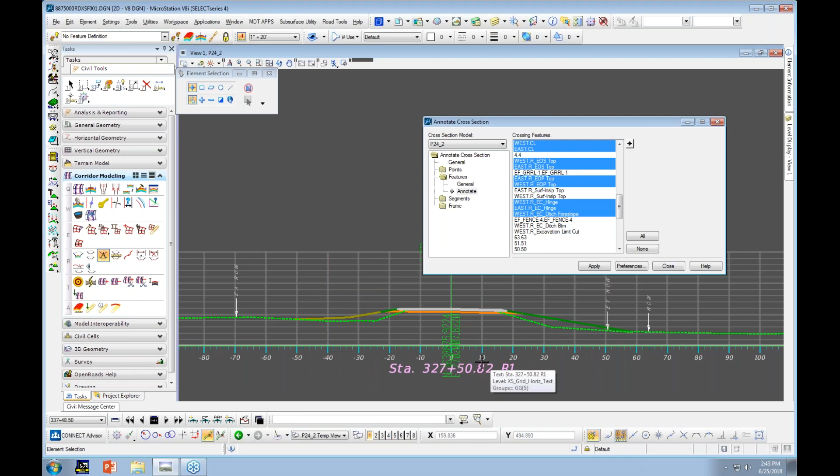So that one would have to be manipulated within the model. I'm not entirely sure what that is. I think... yeah, there's the ditch transition. It's designed to solve before the rest of the ditch. Think of how to get from a ditch to a fill. Yeah, and it's capable of doing those transitions.

It just requires a higher level of... you're dropping your template on some interval, and then you're cutting cross sections potentially at a different interval. So you're looking in between - that's where you have it perfected, 25 foot, potentially. Like, I don't know how to drop it.

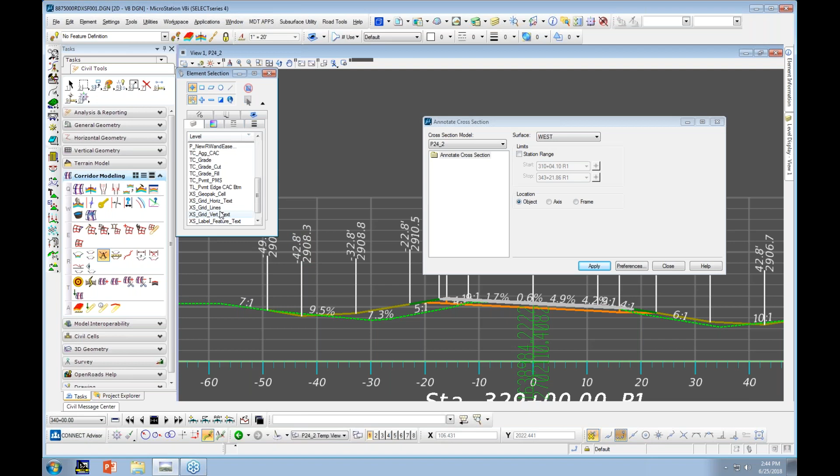Wow, that's not what I wanted. You want those to be as close to each other as possible, showing that, but it's inevitable. There's going to be something in there that, like, oh, we need a cross section right here. I may or may not have a template that hits right there, or it could be in some arbitrary spot. Depends on what the terrain's doing. If it's pretty flat, you zoom in there, it might not be solving, but it's within a couple inches.

It's not for dirt work. Oh yeah, you can pull dirt work off the model anyway. Or that's what you're talking about. All right, let's try this again without failing.

What I did is I just labeled the existing ground, which is why it gave a whole bunch of slopes. You can override those slopes, is that right? Override them how? Like, manipulate your model within the model? Yeah. Yes, I thought you meant the labeling themselves. No, not really. Yes.

This is what we've got set up right now for OpenRoads cross-section. Not the way we're used to seeing it. Not real bad, but they do overlap and they're not the same.

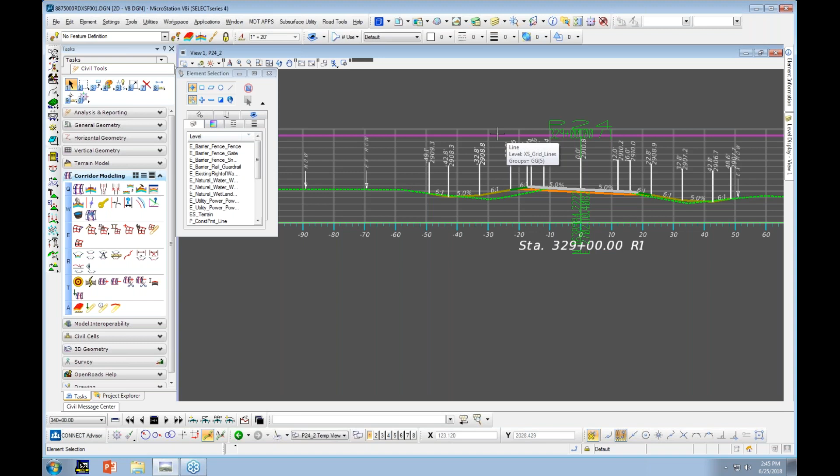So this isn't our standard slopes though, right? Because we got 5-to-1 ditch slopes, or 5% ditch slopes. Oh, that one should be a 20-to-1. Yeah, I think what's set in there is anything over 10, it flips to a ratio.

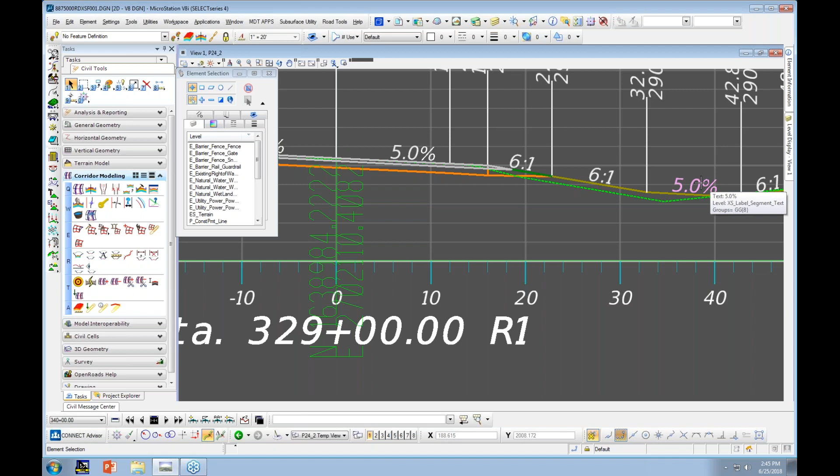This is one thing from criteria that we can't quite get OpenRoads to do, because a 20-to-1 is 5%, but if we got any cross slopes that are 5%, we want it to say 5%, and our ditch is also 5%. We can't call it 20-to-1. If you got 5% cross slopes, you just gotta be careful. If you don't have any 5% cross slopes, you can just either label it 20-to-1 or have it change them all this way. I have faith you can do the math. Well, I failed the first time I looked at it, that's not 20.

Okay, so that's one way. Yes, Harold, I have a question.

On these leader lines, I've seen on some cross sections, they get pretty busy with all the vertical lines. Is it pointing to subgrade? Is it pointing to finished grade? This is all finished grade. But like if you look at 16 feet, see how that line bleeds in and that leader is the same.

And you're just proving my point why this is my quick and dirty. This is not my final cross section. This is a work in progress. I don't know what kind of plans JJ and ESS have for it, but it does work. It gets the point across for a milestone review, some of the first ones.

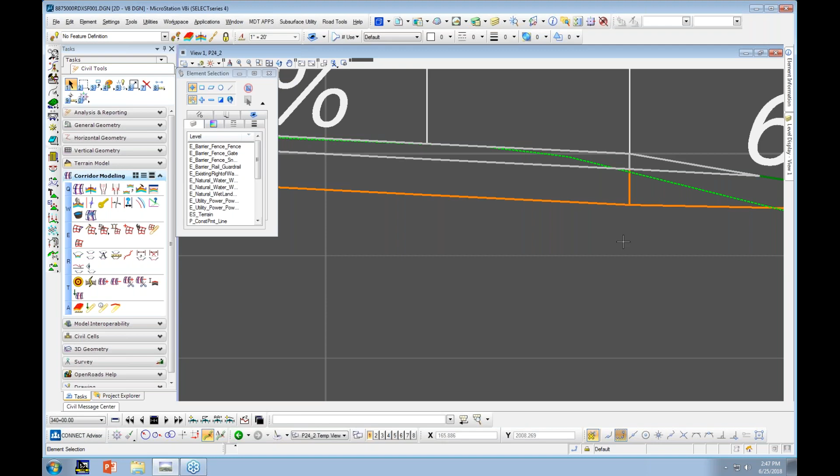Now, the way that I like it, let me get these off of here. Maybe.

And this one is more labor intensive. This requires a pre-setup. Thankfully, you only have to set it up once. This one's within our road tools. It's a macro.

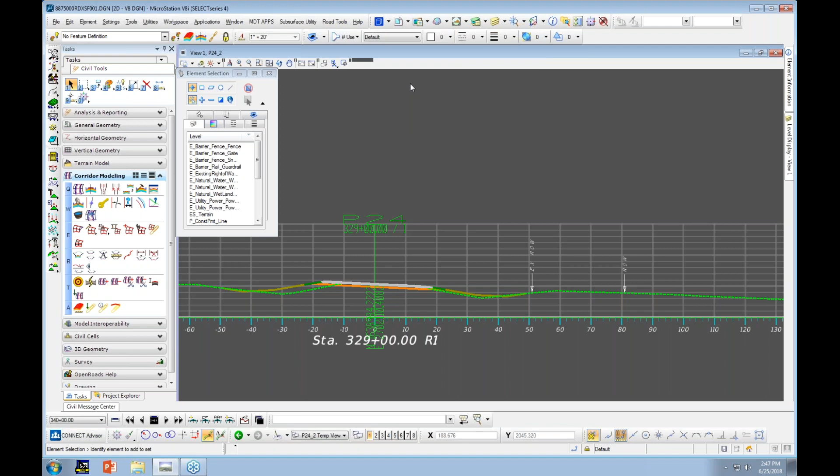Cross-section feature labeling. You'll thank me later.

Okay, if this thing doesn't crash right off the get-go, it will eventually load.

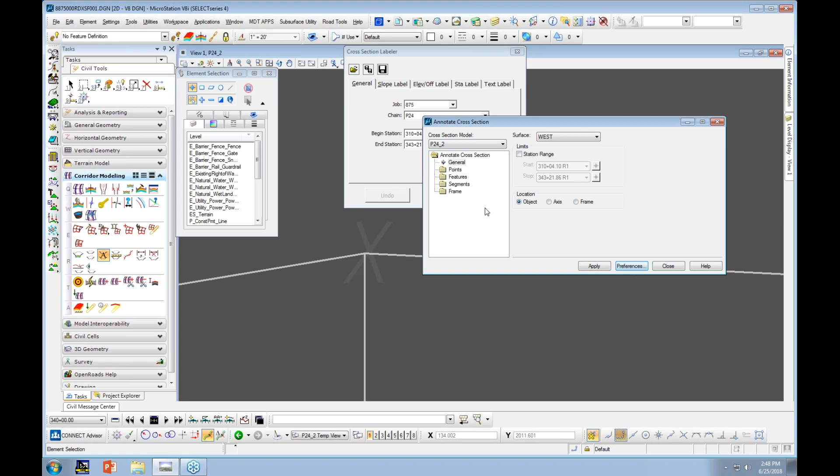Okay, you still use this annotate, but you do something different. Each of these intersections, these points on the cross-section, see that X? That's a named point that JJ has set up to be labeled. What I'm doing is I'm telling it that I want it to label these points with their point names.

So it's the same. Go through this and pick everything. This time I'm just pretty much going to pick everything. This you have to do every time, and know there is no sort feature. Bentley does apparently not believe in that. But if there's something you don't know what it is, you can use that cursor icon to pick it.

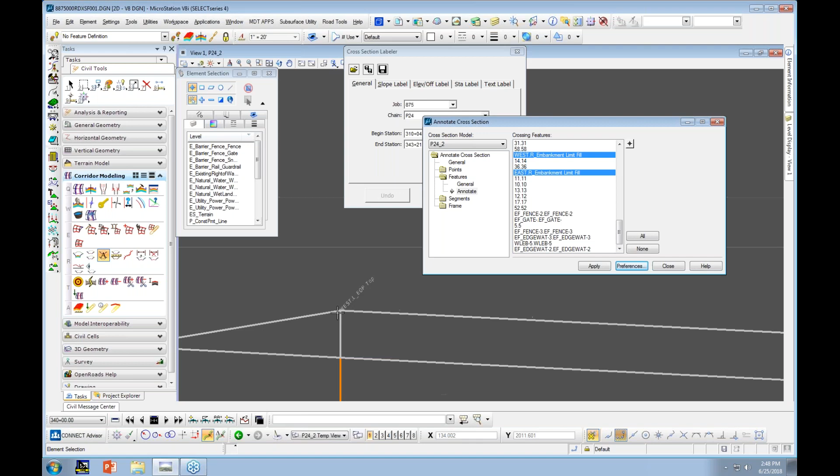Okay, so you can all see under all my crap here that it is now labeled this. Each corridor has a specific label for this point. My west corridor will say west, left edge of pavement top.

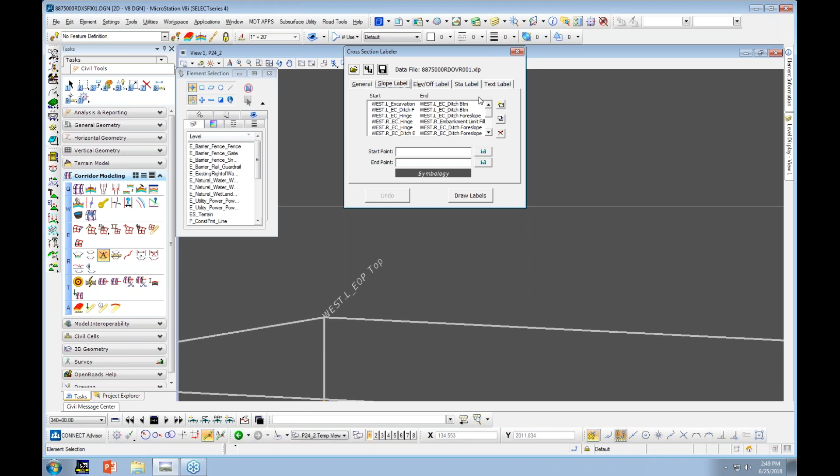So, are these like working labels or something? What's all small? These are working labels. They're what the dialogue is based on.

So, oh, don't crash, don't crash.

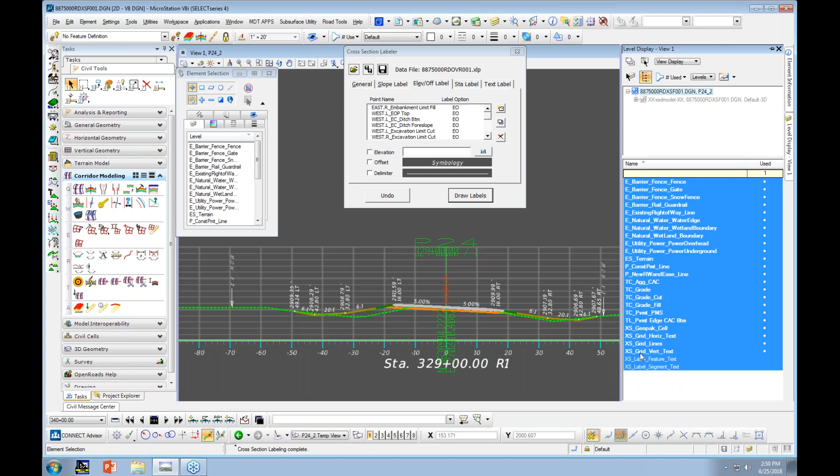That's what the end result of that is. So that looks quite a bit more like we're used to seeing. I can give it a right and a left. I can give it offset. I can set those horizontally, vertically. I can turn them sideways.

There's even a way to cause it to set up a template so that it will label existing ground in there. This is my preferred method, but there are two. We don't have a best practice yet. You're likely going to be seeing both as we review plans.

As I said earlier today, please be patient with us. Your designers and all of us, development team, managers, we're going through a big change. It's going to be rough, it's going to be messy, and it's not going to be quick. We've got a large transition period in front of us. We've got mixed projects, mixed workspaces. You're going to see things that don't look exactly like you think they should, like they always have.

Cut everybody a little slack. Cut yourself a little slack. We can't make it look like it used to, and we can't make it perfect right off the get-go. This is just two different ways to show the same thing right now. Neither of them are identical to what it's always been.